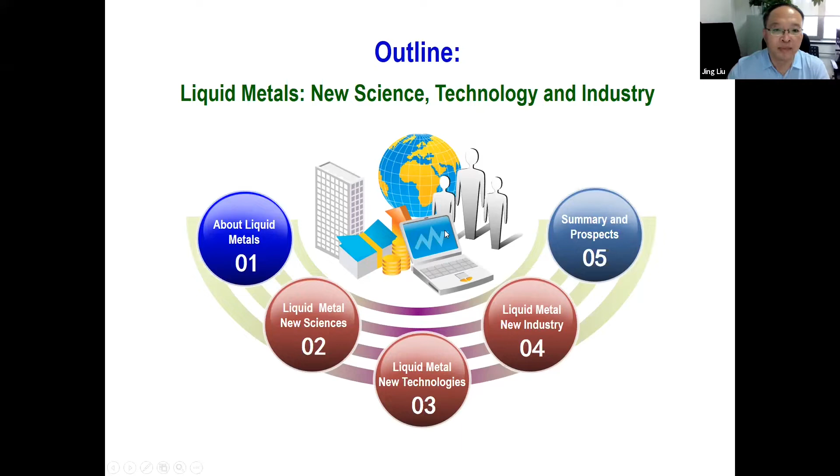So first, I would like to talk about some basics about liquid metals. Then I will go to some of the typical liquid metal science, technology, industry, and then I will finally make a summary. So let's take a look at what is liquid metal.

So as everybody can see here, this liquid metal is in a science fiction film. Of course, it is not true. It is just a fiction. Look at the lower part. This is actually the real liquid metal. It is running inside the supercomputer. Actually, that was made in the year 2005.

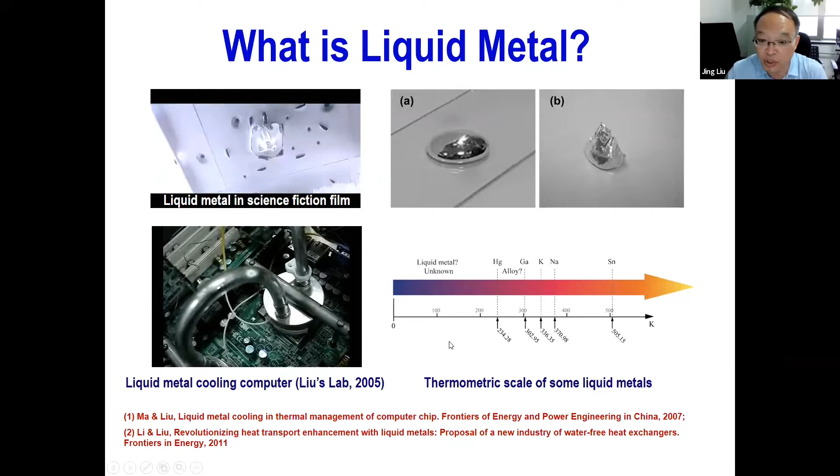And the liquid metals can be like the liquid or some glue-like materials, just on the upper right-hand side. Actually, the liquid metal can be in a wide variety of temperature range, from very low temperature to very high temperature. Actually, the secret lies in Professor Mendeleev's periodic table of elements. There are many secrets lying behind. That means we can make a couple of different liquid metals.

The most classical is gallium. Let's see here, the element number is 31. And combined with other metals like indium or tin, something like that, we can make more liquid metals, which are in liquid state at room temperature. But we can also see other liquid metals, like mercury. So it is pretty heavy.

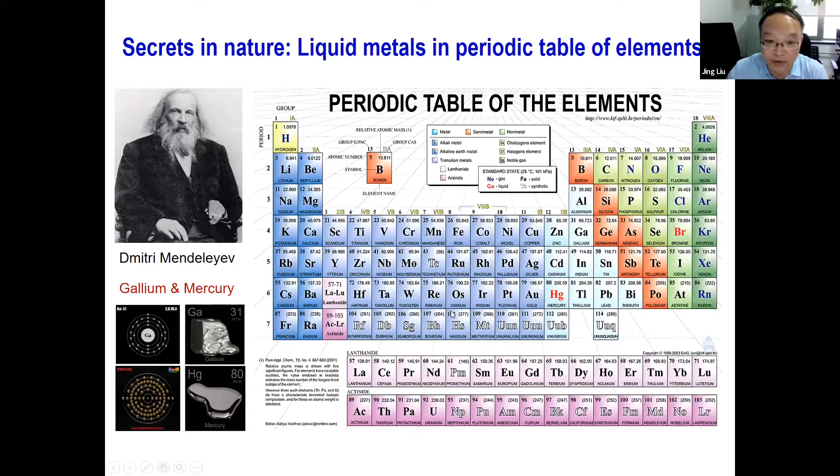Let me give you some more specific information about the liquid metals. So in this table, we can see a couple of very typical liquid metals. The most famous is perhaps mercury. Its melting point is around minus 38.87 centigrade. So this is pretty low. Of course, this is very well known. It can easily be seen in the thermometer or some reactors or something like that.

Of course, liquid metal can also be made as an alloy, like this. This is sodium and potassium. This is an alloy actually. The melting point is below minus 11 centigrade, also very low. It's reactive, but it is useful. In this picture, actually, that was introduced into ablating tumors in the year around 2009. It was also very useful, but reactive.

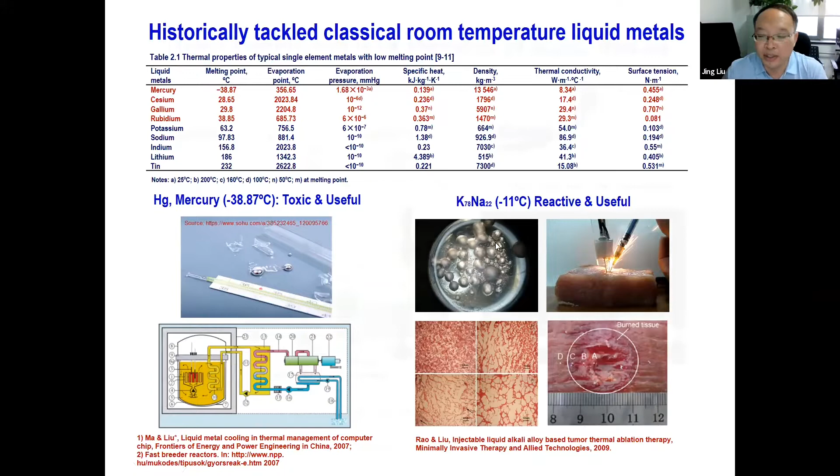And mercury is toxic, as everybody knows. So at this time, what we want to emphasize is gallium in this table; it is very safe, actually. This is also the hot point in this day and age.

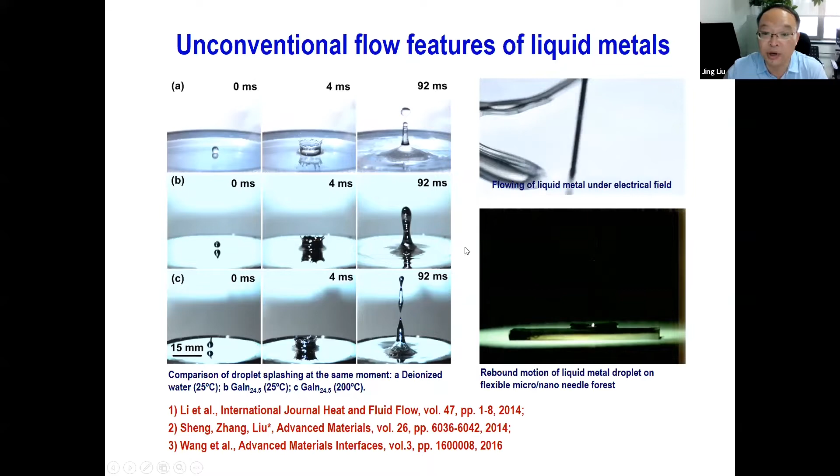So in this picture, we can see here the liquid metal alloy's different kinds of unconventional flow features. Like the upper right-hand side, you can see here, the liquid metal can be driven to flow easily under electricity. And when it is exposed to the air, the liquid metal can be easily oxidized, just in the pictures. So these are just some of the very unconventional features.

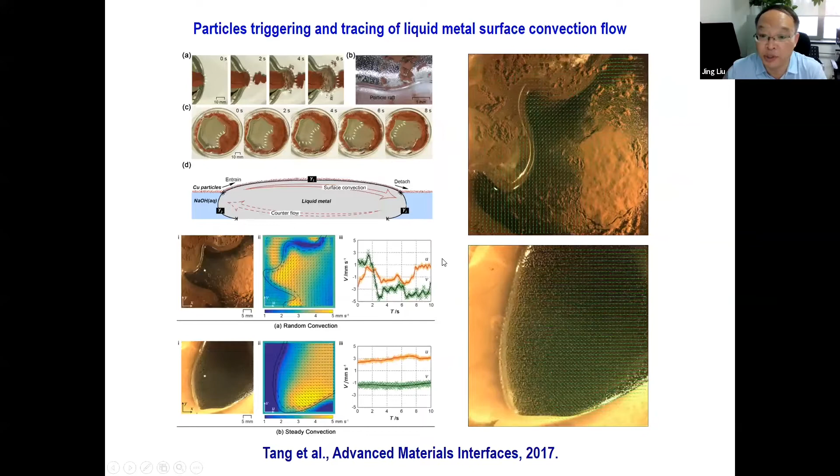And the liquid metal can be easily induced to flow due to its pretty high surface tension. Even nanoparticles will induce liquid metal to flow. So in this slide, we can see here, the flow was just induced by the nanoparticles. That is because the surface tension of the liquid metal has been changed in the solution.

So just to give you some basic information, if we put some of the liquid metal inside the solution, but leave part of it outside, that means at the air-solution interface, we can observe a very interesting phenomenon that is self-beating, just like a heart. That is because the oxidation process and the dissolution process happen simultaneously. So we see this phenomenon as a way to harvest energy.

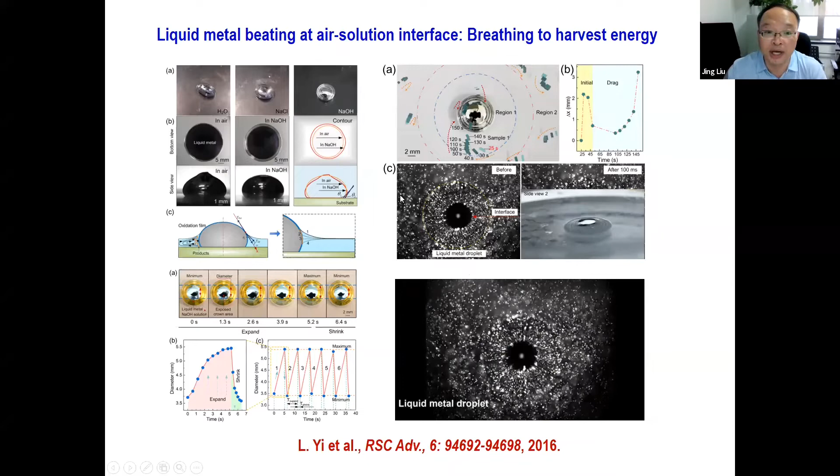And if we want to add some external nanoparticles inside the liquid metals, we have found that using the electrical fields, we can eat the outside particles inside. So what's here? The microscale particles, the copper particles and the nanoparticles can be swallowed inside. So this is a very interesting phenomenon.

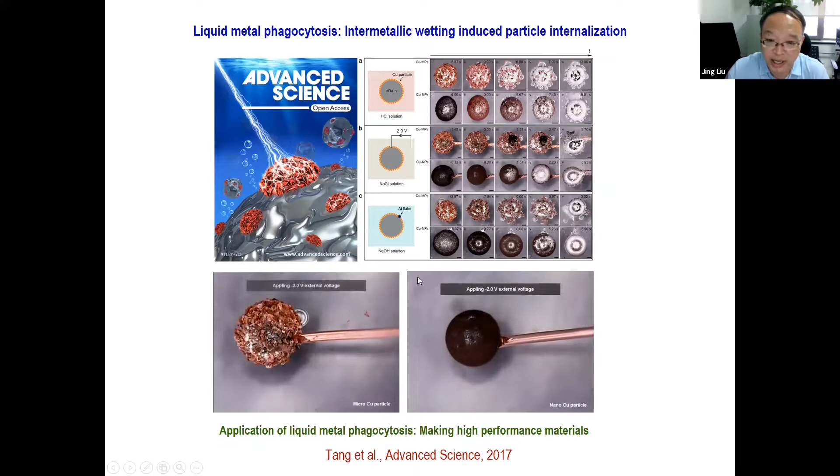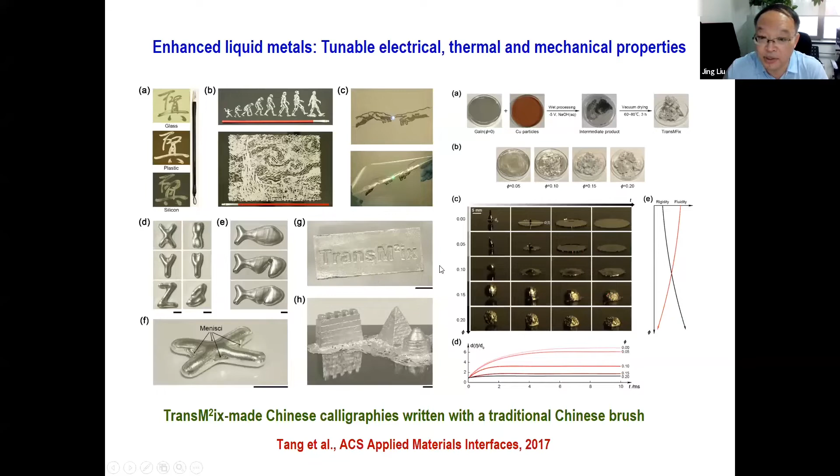But it is not just fundamental. It has very, very practical values. That means we can make much higher performance materials. In this case, we can fabricate very conductive electronic ink, or some other very similar conductive materials. This can be used as thermal interface materials. So some basic findings can be very useful.

If we combine the liquid metal with some other polymers or some silicone oils, we can make thermally conductive but electrically insulating materials. So that means liquid metal can also be used as liquid fillers. So this actually starts many fabrications of new materials combining the liquid metal with other non-metal materials together. So this picture shows a very high thermal conductivity, but a very low electrical conductivity. This material is very important for some packaging.

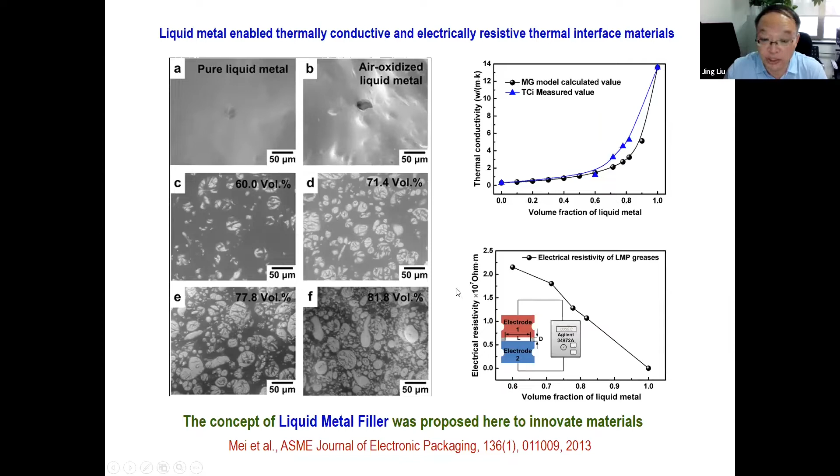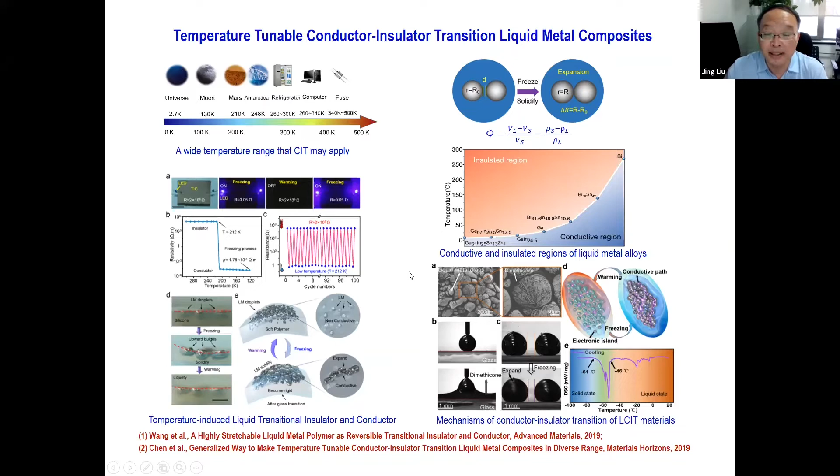If you use temperature to tune the material, you can find that under some temperature range, the liquid metal composite will become insulating. But when you freeze it, the liquid metal composite will become conductive again. This leads to the finding of the conductor-insulator transition liquid metal composite. And the materials are in liquid state. And the candidates are pretty wide. So I just give you some basic information about the science or some other applications.

If you want to make the liquid metal beautiful, you can just add some fluorescent particles to the liquid metals. This kind of material can also be used to make such things as biomedical channels. So it can be driven to flow inside the solution. And of course, liquid metals can be made very small, just like tiny micro or nanoparticles. So this can be very useful in making a couple of different materials with very different functions.

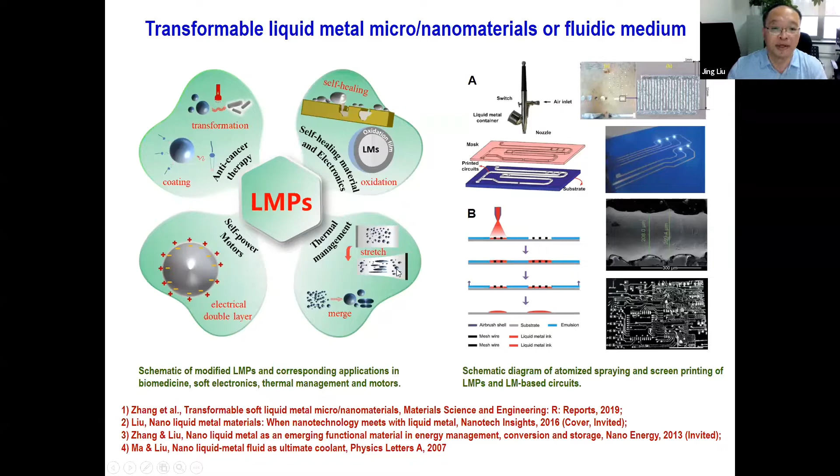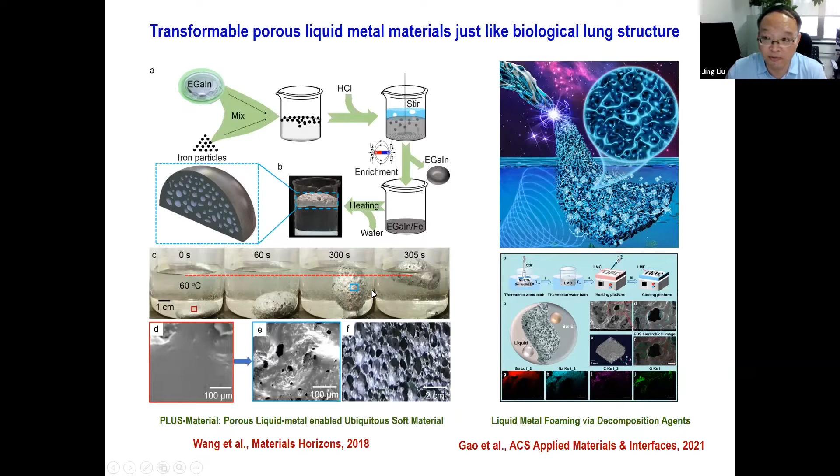But unlike the classical rigid micro nanoparticles, the liquid micro nanoparticles made of liquid metal are transformable. So this is a unique difference with the classical nanoparticles. And of course, if we introduce some chemical reaction mechanism, we can find that liquid metal can even be made as a porous structure, just like the biological lung. See here, like these pictures. Such kind of material can float on the water surface. So this is the capability liquid metals offer to the technologies.

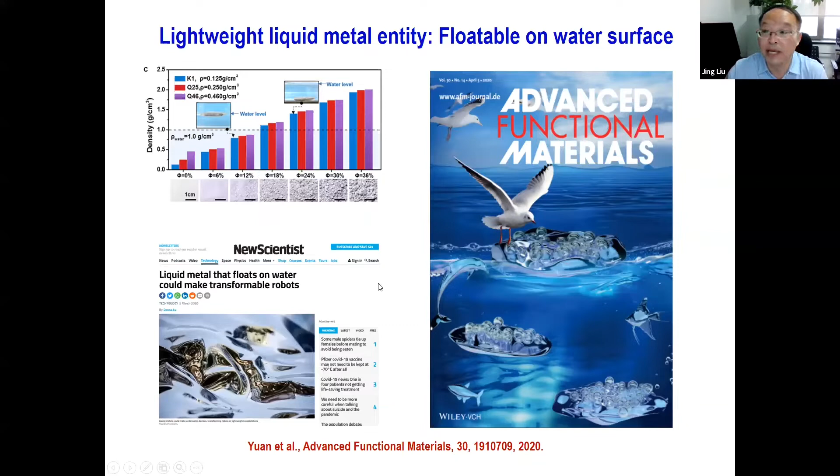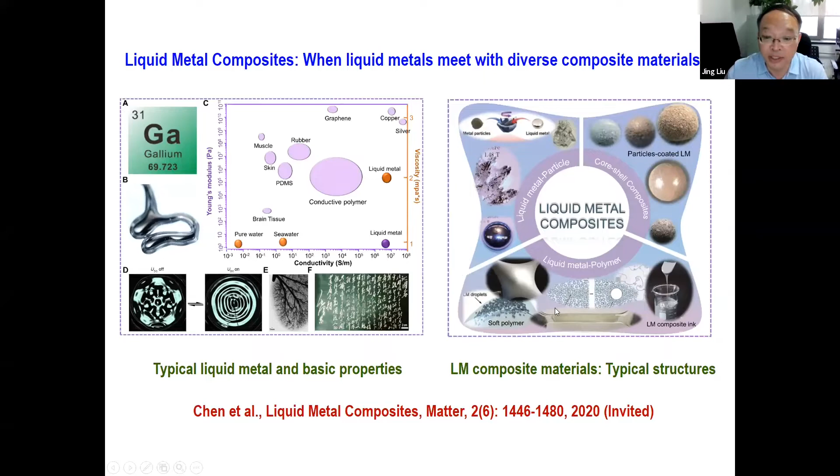And of course, if you want to make a liquid metal a little lighter, you can combine it with some other materials like hollow bubbles. You can make some lightweight liquid metals that can also be used for making softer robotics, something like that. In fact, the liquid metal can be combined with more different materials to make liquid metal composites. Of course, the candidates are too many. I just give you some basic information. And of course, the applications are diverse.

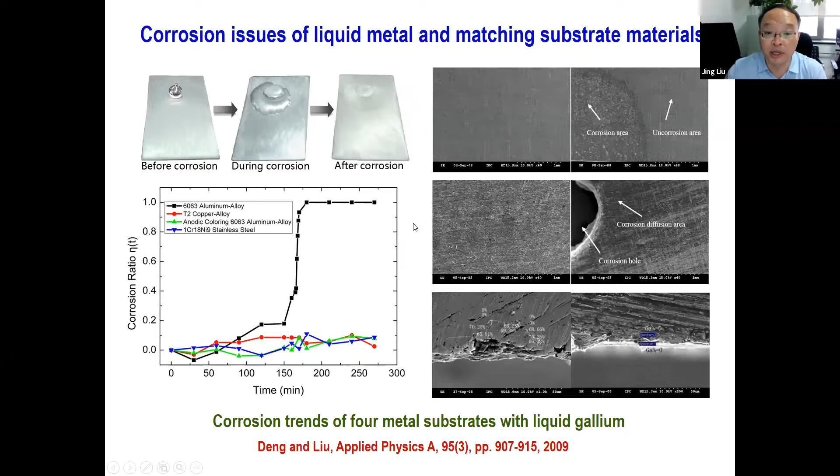But one serious issue I should share with you is the corrosion. These pictures are from the year 2009, when we made some liquid metal chip coolers, we found that the liquid metal will corrode some aluminum substrate. So this is, of course, very dangerous for some devices. So I share these slides just to give a caution that we should be careful when we use liquid metals to make different technologies.

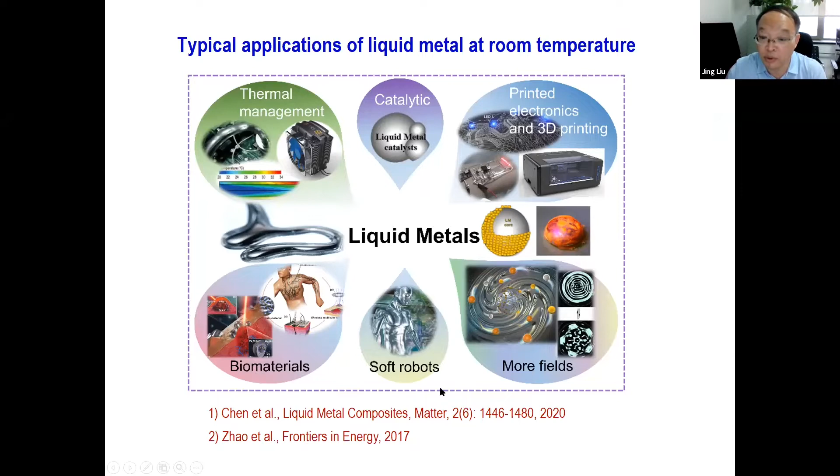So far, a lot of very fundamental effects or phenomena have been disclosed on liquid metals, but I should say that this area has endless questions or frontiers, and these discoveries will lead to many very important applications. In this slide, I list several of the most typical applications developed over the past few years. The major direction is thermal management, such as cooling the chips or some systems. Another very important area is printed electronics and 3D printing. And liquid metals, of course, are very important for making biomaterials. And of course, it has led to the making of some new generation soft robots. In the future, more fields can be disclosed.

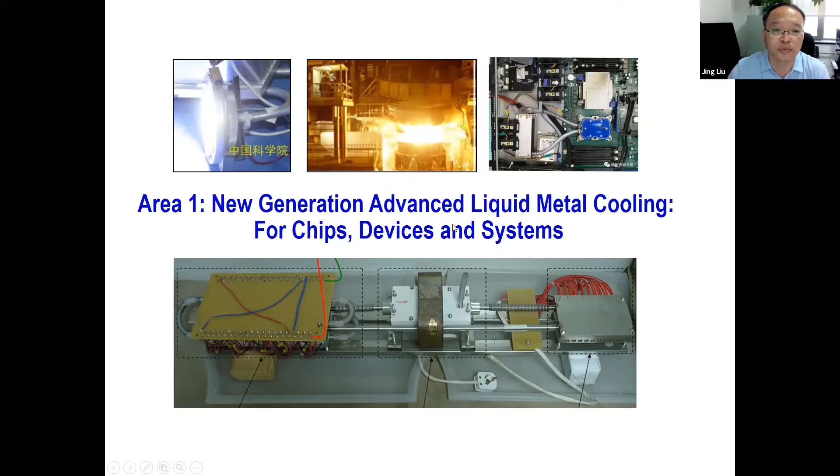It indicates the integrated density of the devices is increasingly becoming larger. So the chips become very hot, so cooling is a very serious issue. So around the year 2000, at the start of this century, I considered perhaps we need to find some new solution. Then we proposed the idea of using liquid metal for cooling devices.

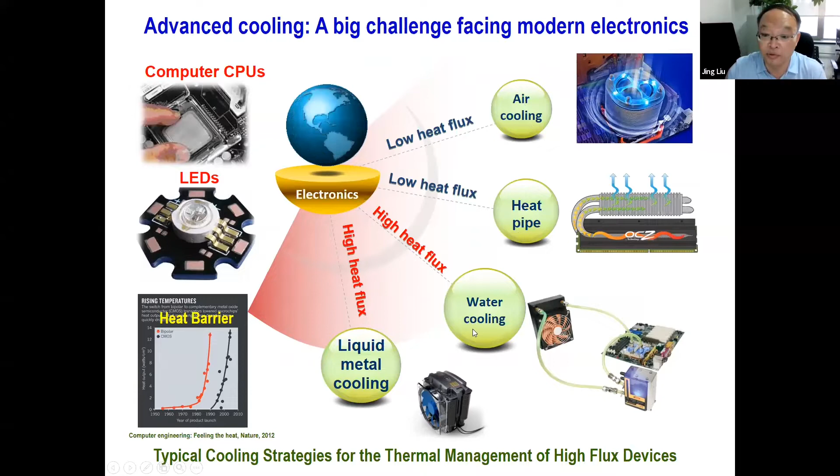So this slide shows the development trend of different kinds of cooling methods, from air cooling to heat pipe to water cooling, until liquid metal cooling. Unlike traditional cooling, liquid metal cooling has very unique performance, because liquid metal would evaporate or boil only at around 2000 centigrade, but water evaporates or boils at around 100 centigrade. That means liquid metal can sustain pretty large power and pretty hot chips.

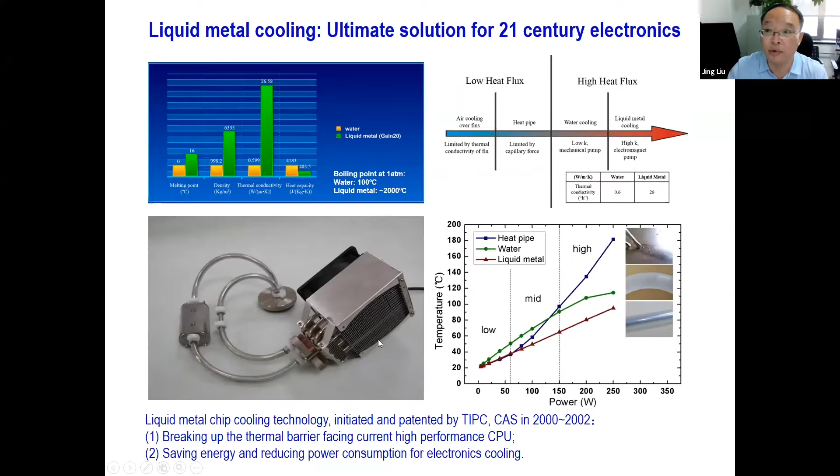So these are some of the prototypes we made almost 15 years ago. And some of the prototypes have received recognition from the societies. This is actually the earliest prototype we made in the lab for computer chip cooling, this device. This research was awarded the best paper of the year award from the ASME Journal of Electronic Packaging around the year 2010.

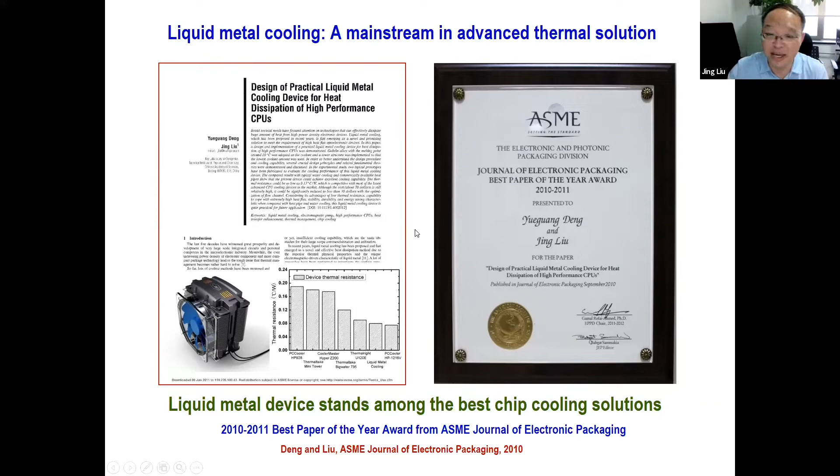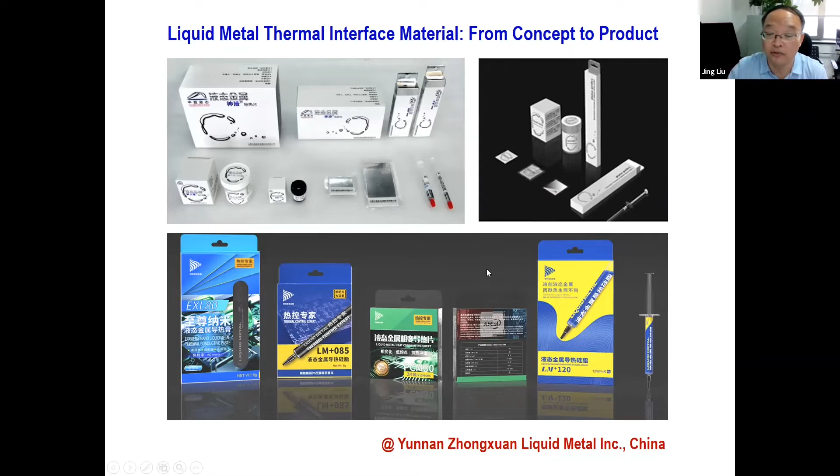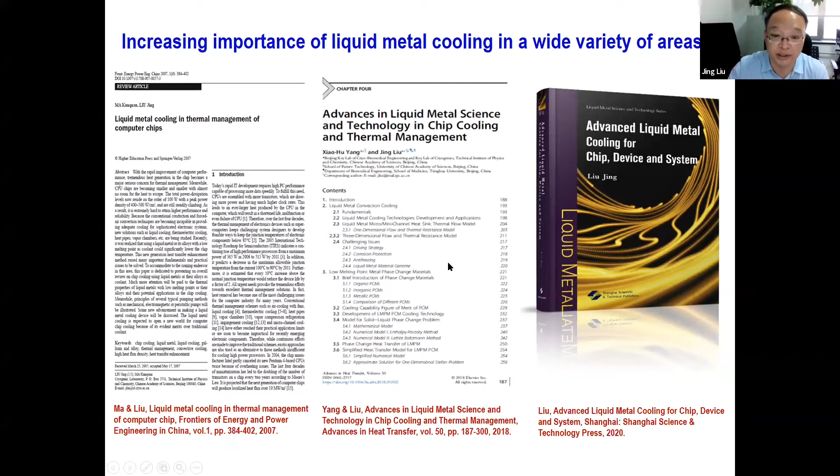We noticed that at that time, more and more groups realized the importance of liquid metal, and I'm very happy to say that a great many groups are joining into liquid metal in different areas. Regarding liquid metal, we have also made different thermal interface materials. Actually, such materials have been translated into industry for thermal management. And the applications and research are increasing. We have been invited to write some book chapters and books in these areas. If readers are interested, just try to check them out.

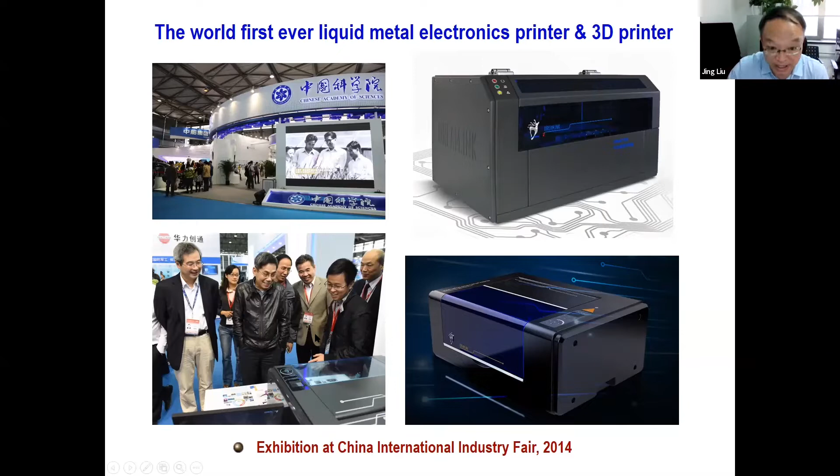So these are actually the prototypes we exhibited at the China International Industry Fair in the year 2014. These are two prototypes. This is also the world's first ever liquid metal electronics printer. This picture shows, on the left-hand side, the vice president of the Chinese Academy of Sciences. This is my student, also CEO of a now well-known company. This is a prototype. And let me show you some workings of this kind of machine.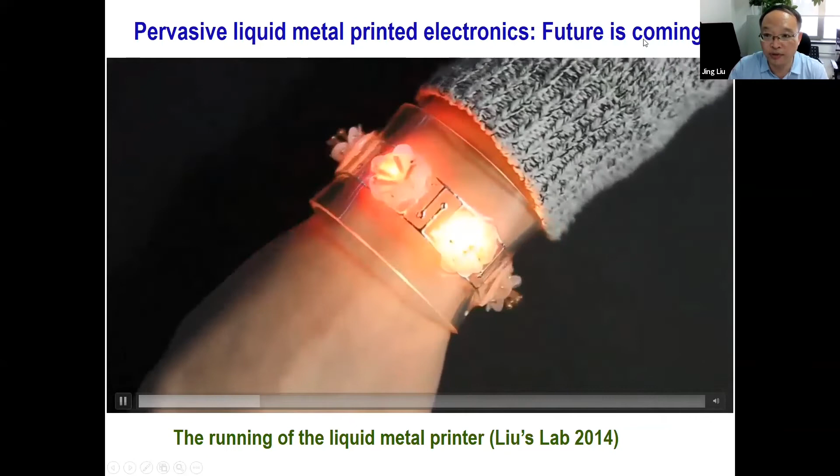So it's just one word: the future is coming. This picture shows that liquid metal printing can print what you want, hopefully in the future. Right now it is still gradually developing, but in the future, I guess more items can be printed out. And of course, we can make liquid metal into a handwriting pen.

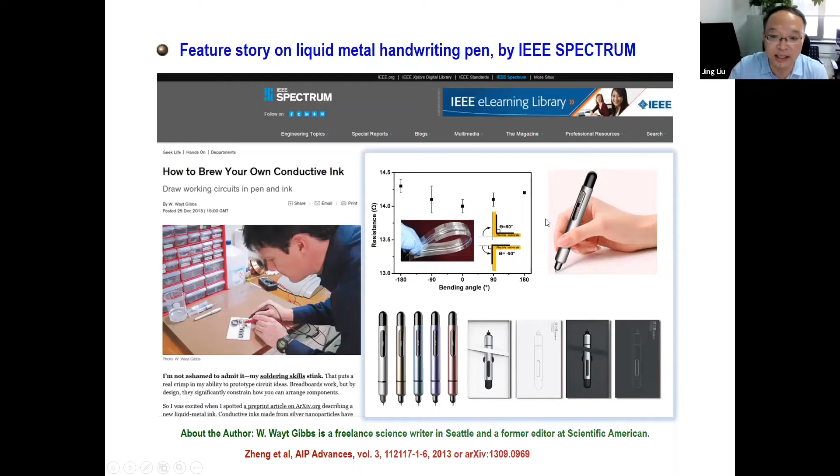This was made in the year 2013, and it has also been featured by IEEE Spectrum. This is Mr. Gibbs, the former editor from Scientific American, who wrote a story to illustrate the application of this kind of handwriting pen. And this kind of technology has also been used in some schools and universities.

So unlike traditional printed electronics, liquid metal printed electronics can be applied to any solid surface. Our study shows that liquid metal electronics can be made on nearly all different kinds of substrates, like leaves, glass, cloth, or even skin. MIT Technology Review wrote a feature story about this breakthrough technology.

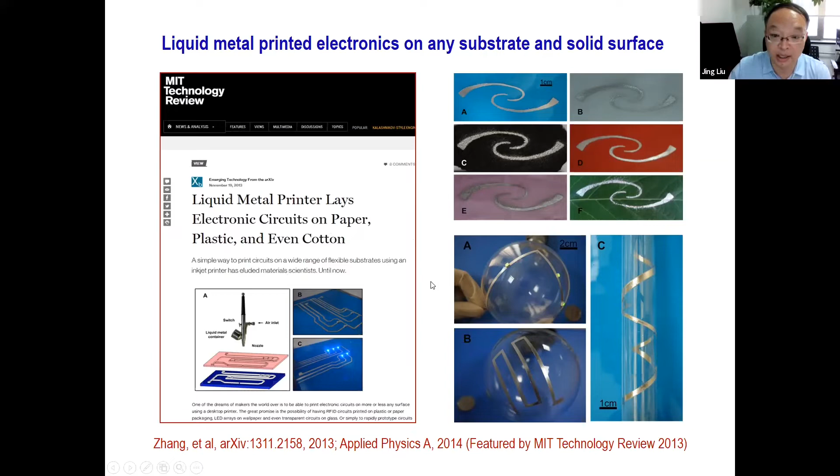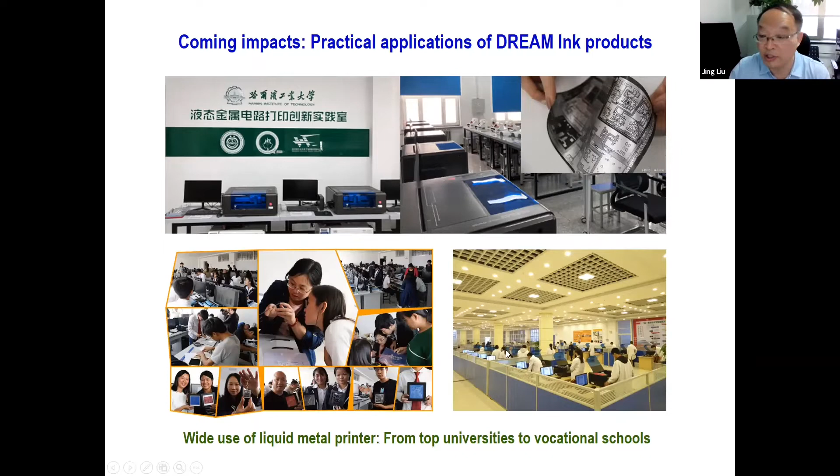So right now, a lot of prototypes and machines have been made. This picture shows the practice of liquid metal printers. Actually, so far, it has been increasingly used throughout the whole of China, from very top universities to some vocational schools. And of course, the invention of the liquid metal printer has also received recognition from the world. We are very lucky to do some useful things for society.

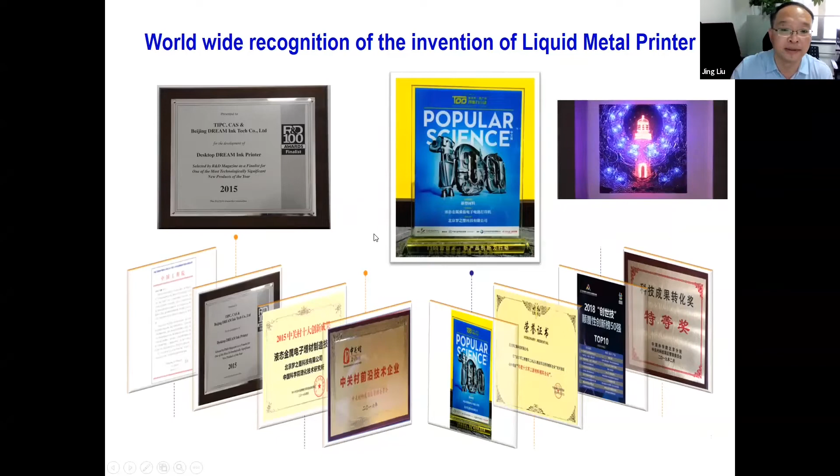So the awards, like the R&D 100 Awards finalists, and also Popular Science's most important technology, or something like that. Of course, liquid metal will be useful for healthcare, just as I mentioned a little earlier. So right now, this is also becoming more and more important. And we had also been invited to write a book on liquid metal biomaterials by Springer. So I will give you some examples about the applications and the technologies, or some findings.

Most of the application is for making wearable soft electronics. Just as this picture shows, we can make soft healthcare devices. They can help to monitor physiological states of humans. Such devices can be printed on paper, so that will reduce the cost. And the technology can communicate with mobile phones. In the future, people can use such technology to make more different applications.

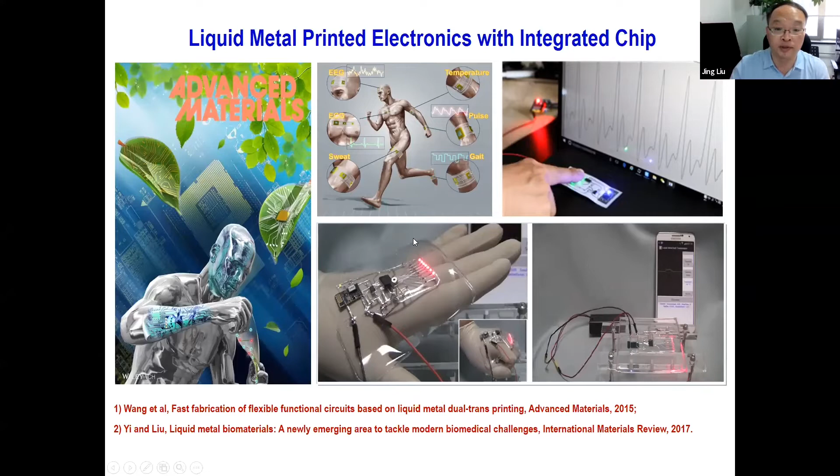A lot of very renowned science media like the MIT Technology Review and New Scientist have written stories. And we still keep working on that. Hopefully such technology can help some patients in the coming time.

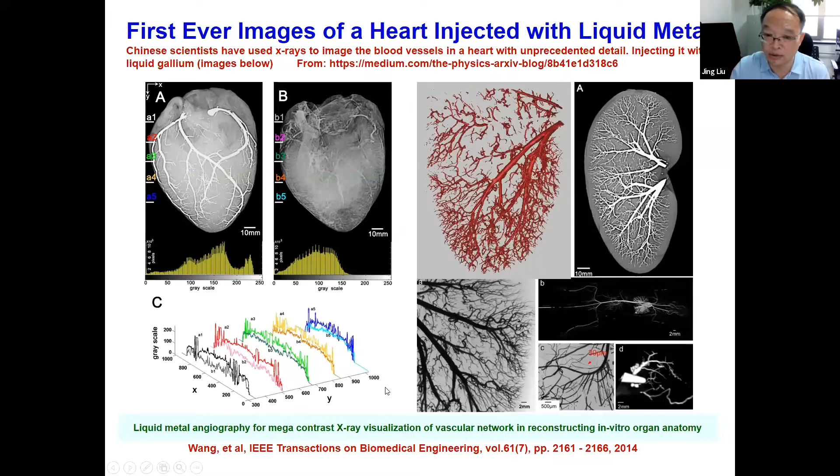This picture shows that liquid metal can be used as a high resolution contrast agent. So let's take a look here, the image on the left-hand side. This picture shows liquid metal contrast imaging. And this one, figure B, uses a classical imaging contrast. So we can see here, via the liquid metal injection, we can show the anatomical structure with very high resolution. So this shows that liquid metal is very helpful to realize high resolution imaging. The other images show some of the organs, the whole body, or some of the applications.

And of course, liquid metal can be developed as injectable electronics. It can also be used as a bone. This is based on a different liquid metal, based on Bi, another low melting point liquid metal. So you can inject it in a liquid state, but finally you will get a solid material. So in this case, you can make bones inside the human body.

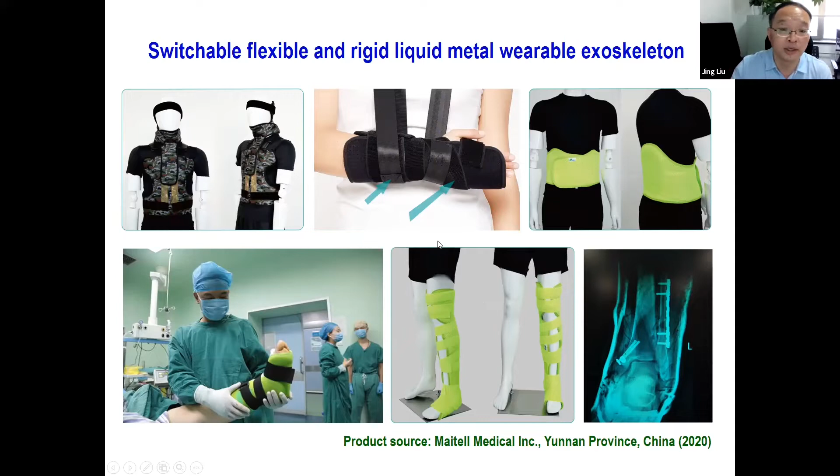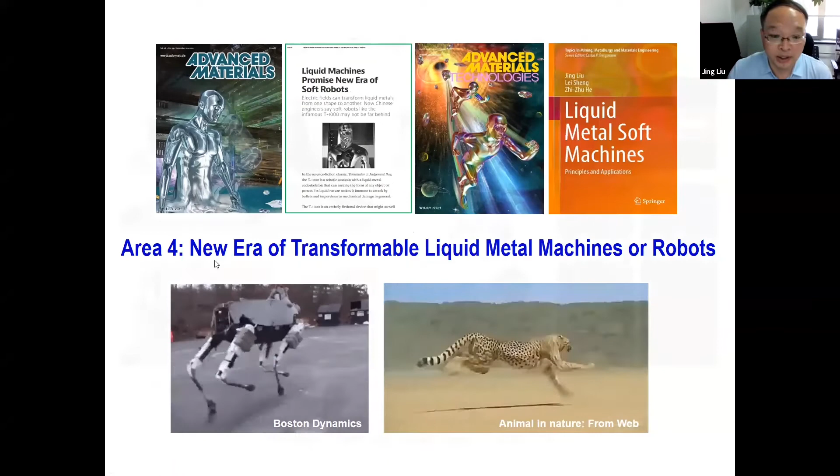On the left, that is the first of findings: liquid metal can be used and controlled to transform. The world said such kind of liquid machines promise a new era of soft robots. We've also been asked to write a book for this kind of material, but there's tremendous research needed in the future. Let's take a look at the basics of such liquid metal.

The first is it is programmable under small voltage of electricity. Depending on the program, you can make different patterns and behaviors, and the transformation is reversible. Sometimes you can rely on chemical, mechanical, or other factors to realize very complicated behaviors.

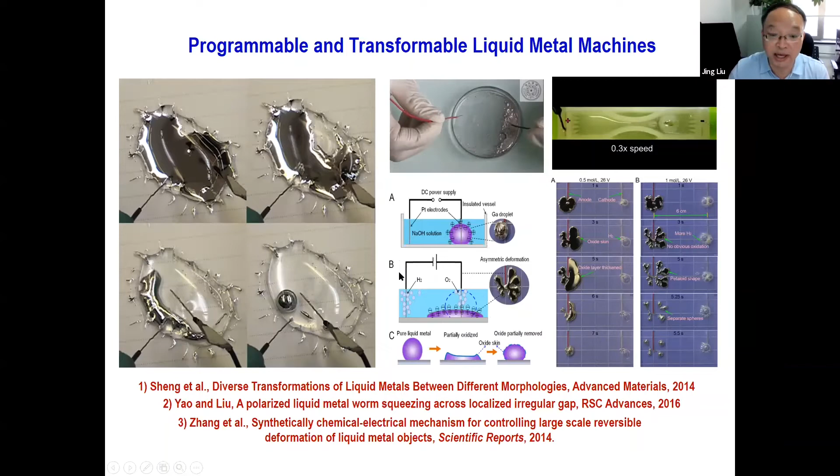The most fascinating behavior is the self-fueled behavior of liquid metal. This has some music—this was made by New Scientist using our videos.

In this slide, we can see liquid metal is just running itself based on the fueling of the aluminum—this is the aluminum. This kind of machine is self-powered, without any other electrical or magnetic field or something like that. This is a very fantastic phenomenon for liquid metal, such unconventional materials.

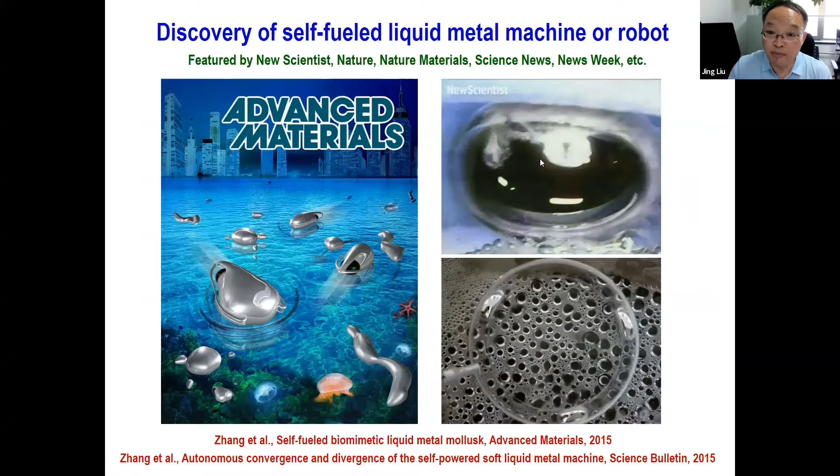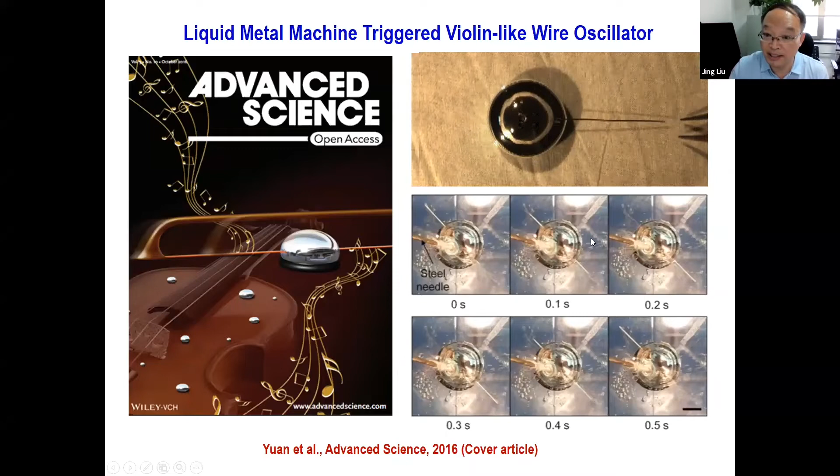Such machines can be used to realize some oscillators. This is a liquid metal fueled with aluminum. It can swallow the metal wires inside, which leads to oscillation, not just a single direction movement. This wire oscillation's frequency and magnitude can be controlled by another metal. This phenomenon is actually a total contribution from the material side, the solution effect, and also some surface tensions, and the mechanism is rather complex.

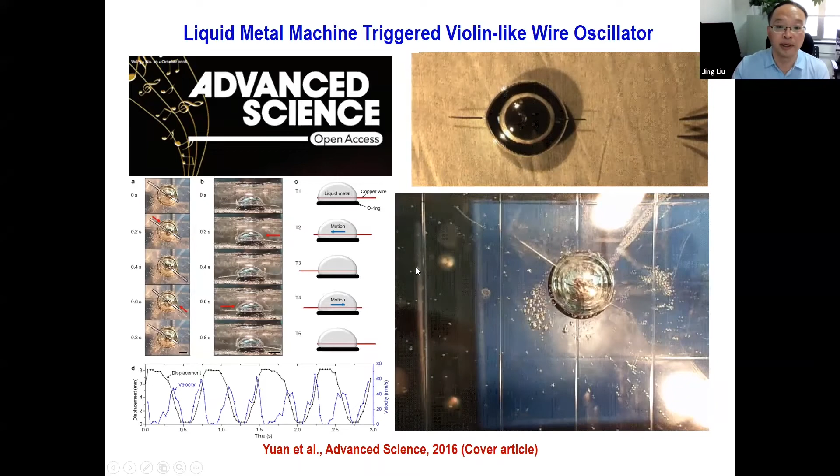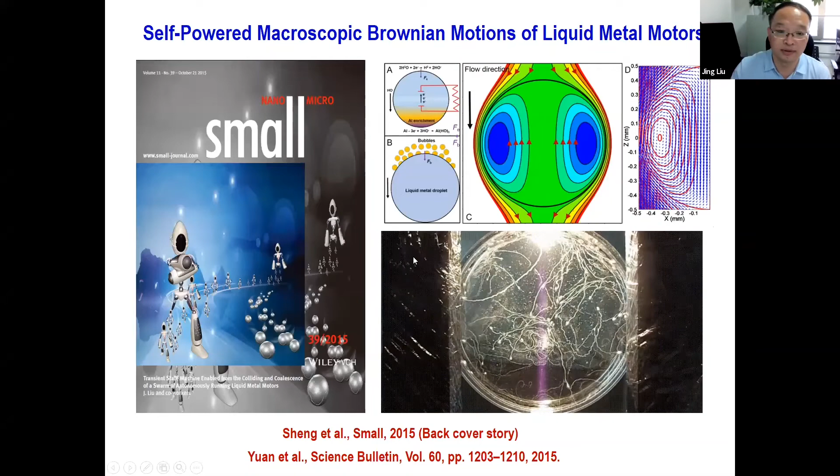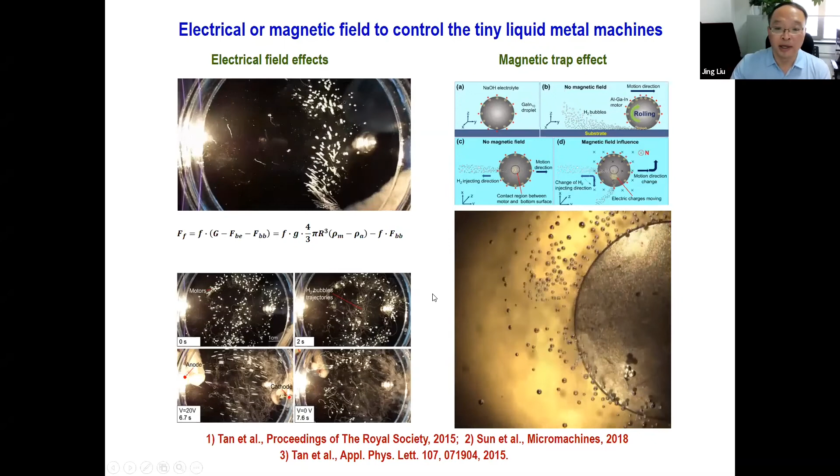The readers may ask, can we make soft robots? The answer is, of course, yes. This slide shows some machines made in the lab.

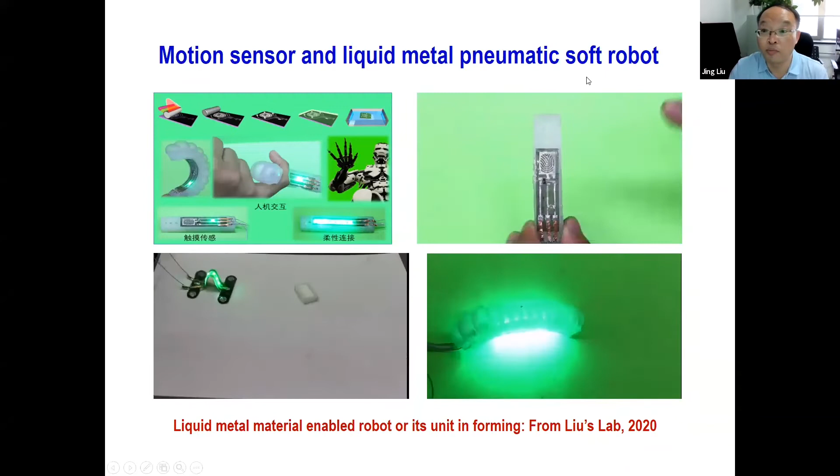Some of our students from electrical engineering and materials can make different flexible machines that transform their shapes to realize different behaviors. Such material can also be made as sensors or some pneumatic actuation robots.

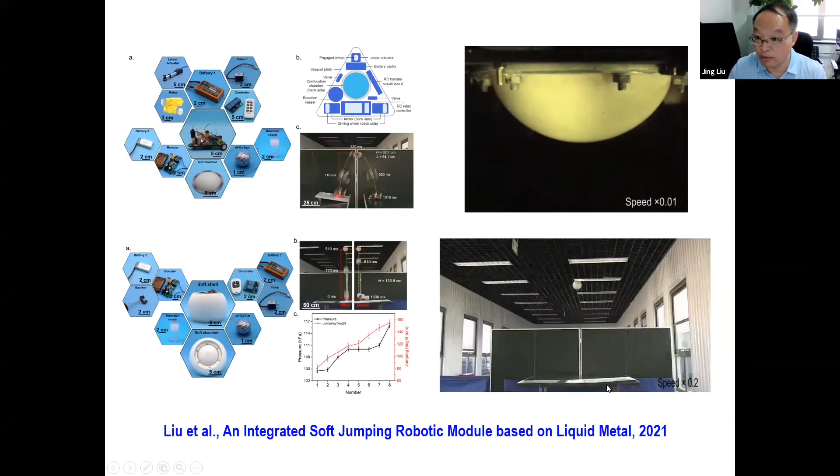Such machines can even be made as jumping machines, based on energy induced by the liquid metal. Liquid metal can quickly lead to the generation of hydrogen; if we ignite the hydrogen, it will realize a very large magnitude transformation, leading to the jumping of such robots. This can be very useful in some special cases.

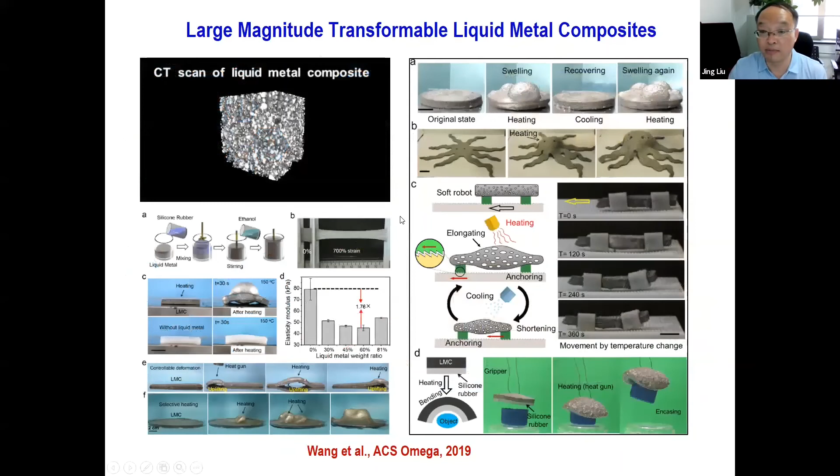Such material can also be made as a composite, and then you can make some programs. The program can be used to manipulate and control such composites—you can make robots as you like. In the future, different kinds of devices can be incorporated to realize moving, transforming, jumping, or other interesting behaviors.

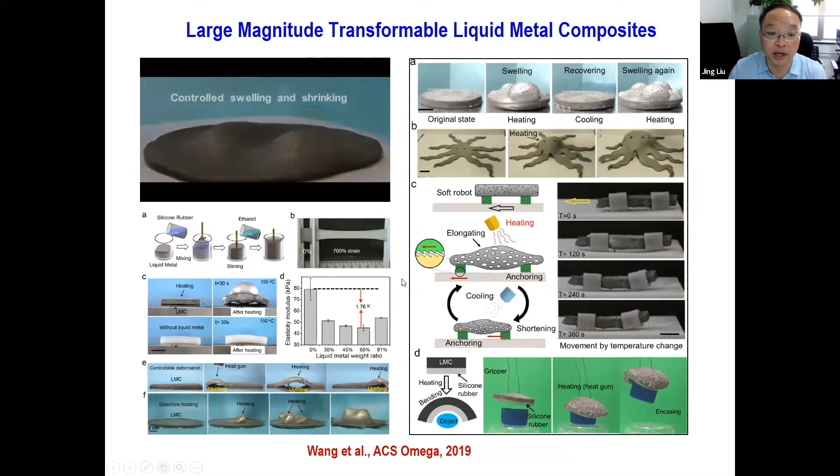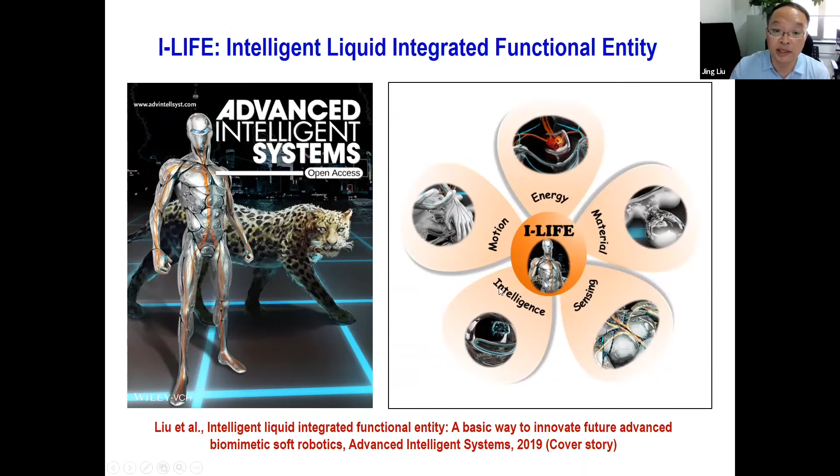At this stage, I should say the liquid metal robot is still in its incubation stage. In the future, small completed robots will be developed. We had proposed the basic idea of using intelligent liquid to integrated functional entity. In this case, we can make more complicated transformable robots, and the research should include motion, energy, material, sensing, and artificial intelligence—so we can make robots very much like living beings.

As the last part, I would like to share with you the industries enabled from liquid metals. So far, we have tried our best to help the industry develop some very practical products.

Right now, several big places like Beijing and Yunnan province, different areas and regions in China, have launched new companies, new industries, and quite a few practices.

Yunnan province may be the most beautiful province in China. It has been named the kingdom of animals, the kingdom of plants, and also the kingdom of non-ferrous metals. That means we can find a lot of different metal candidates to make liquid metal materials. So this is a very nice province for the future.

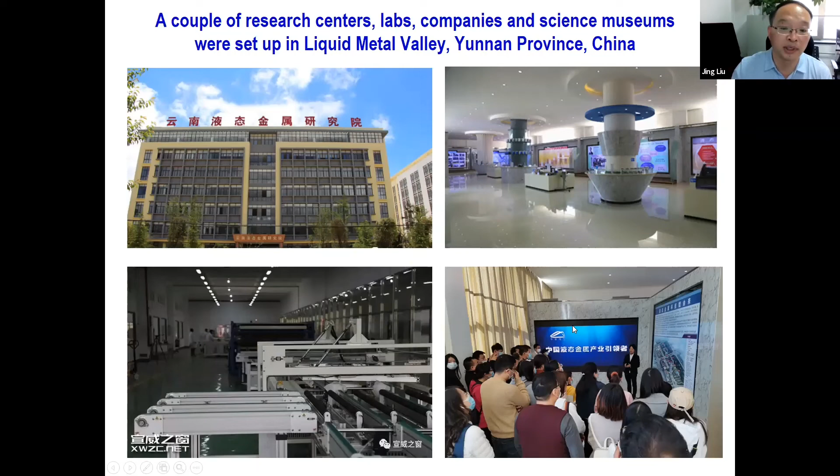A couple of research centers, labs, companies, and science museums have been set up in Liquid Metal Valley. Already a lot of people frequently visit and cooperate to make some applications. These are just some very useful leading product lines for fabricating liquid metal functional materials and devices.

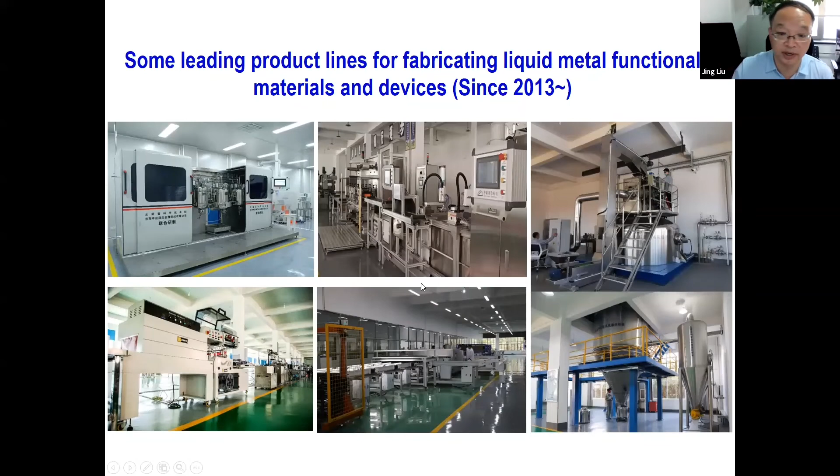The devices are pretty much developed, and if you get a chance to visit, I will be very happy to show you more in the coming time.

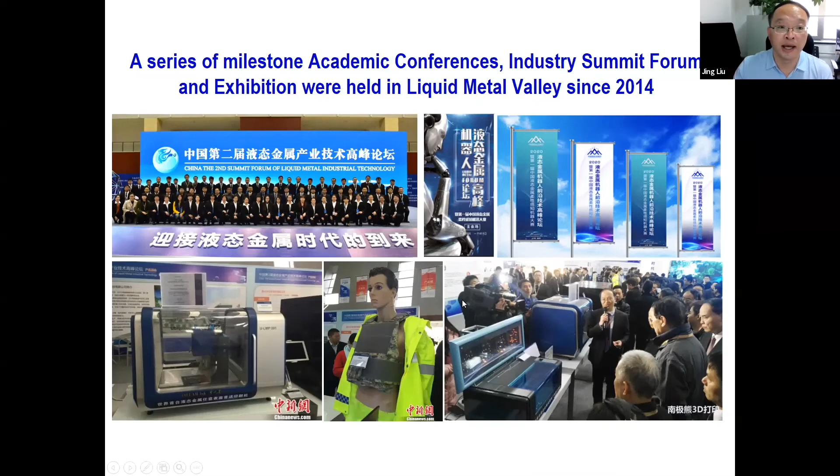So far, a series of milestone academic conferences, industry summits, forums, and exhibitions have been held in Liquid Metal Valley, and a lot of equipment has been exhibited. These are just some of the events that happened over the past few years, and the technology has actually aroused big attention and generated a big impact on society.

This is Prime Minister Li and the President of the Chinese Academy of Sciences. Prime Minister Li is trying to use liquid metal handwriting to write some electronics. And this is Vice Prime Minister Li Yuanchao, taking a look at the exhibition of liquid metal technologies.

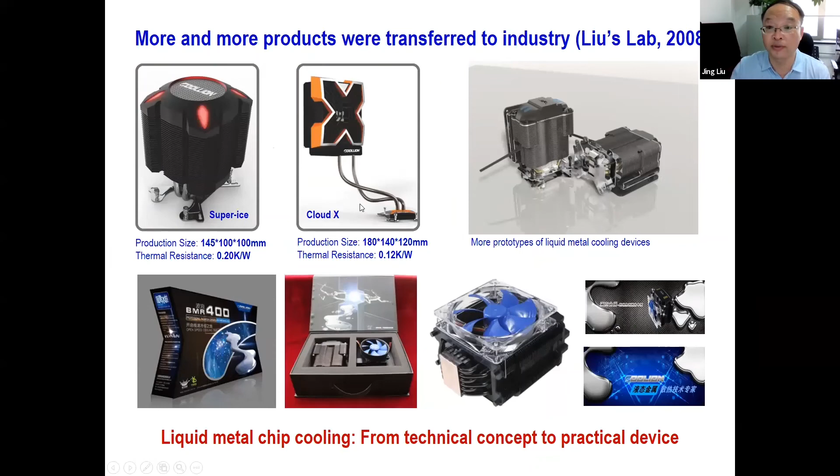So far, a lot of very advanced liquid metal devices have been translated into industry. These are some of the computer CPU liquid metal cooling devices we transferred to industry around 2008, and more prototypes of machines have been used right now. Such technology has also been gradually adopted by world companies.